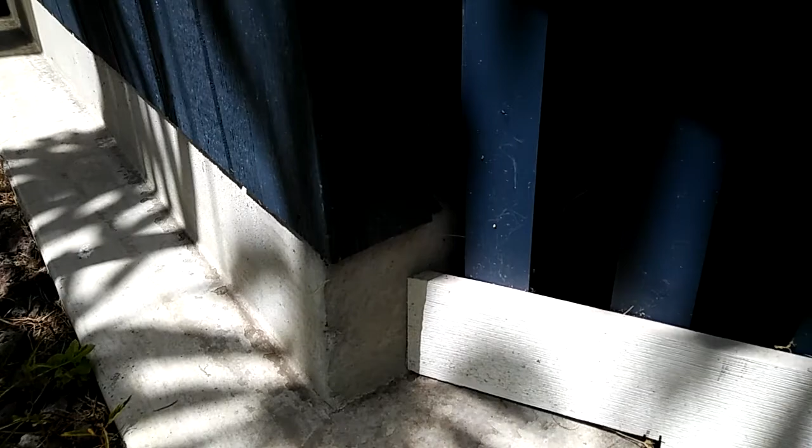I'd like to start off with concrete. I decided to go with this curb design because I saw one that was done squared off, and out here the rain comes in sideways quite often. So water builds up on top of the square, and it starts rotting the walls out. So I went with the curb design, which turns out to be superior. That was the only thing I contracted out, the concrete work.

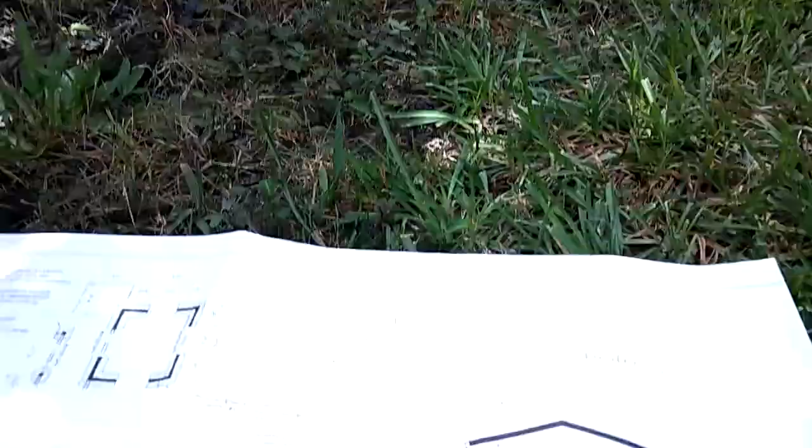Next in line are these walls. This here is the foundation, and you can see these 4 boomerang shaped concrete pieces, 12-sided.

Now this is a permitted build. You can build it this way even if you don't get it permitted at first, but in the long run, if you ever want to sell it, you could get the legalities done on the structure and the inspections. Out here in Hawaii it's kind of a choice, permitted or non-permitted. But permitted is better, because 10 years later you could decide to sell it.

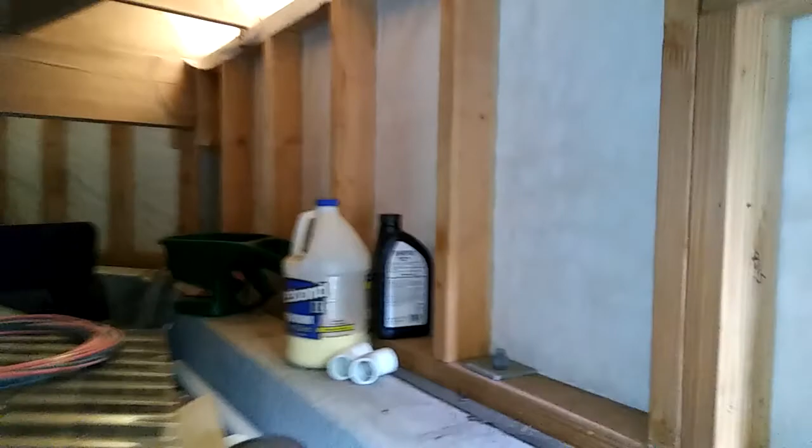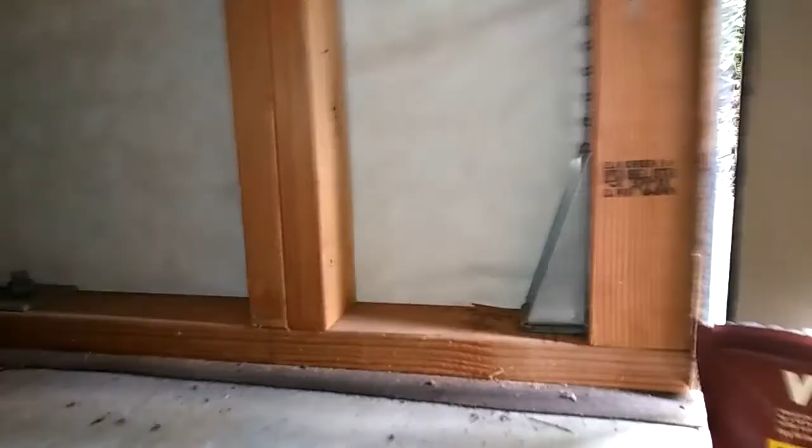So the first thing you'd build is these little walls here, about 4 feet tall. All my footers were not level with each other, so I had to adjust the walls - pain in the butt. But basically I just framed out 2x4 walls with treated boards, with the exception of the lag bolts coming through the concrete.

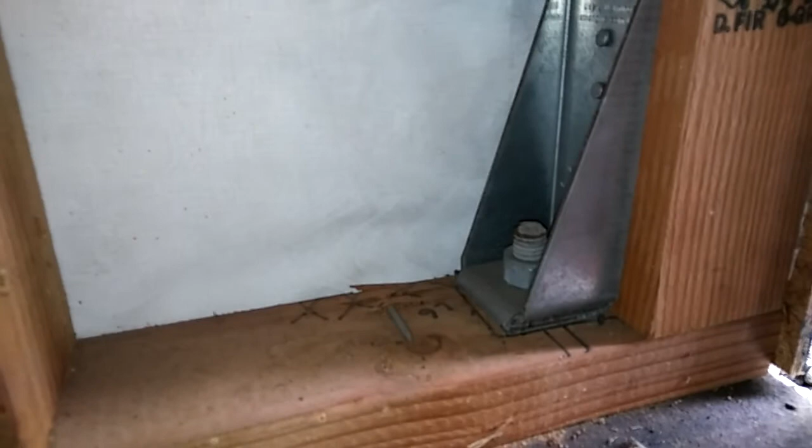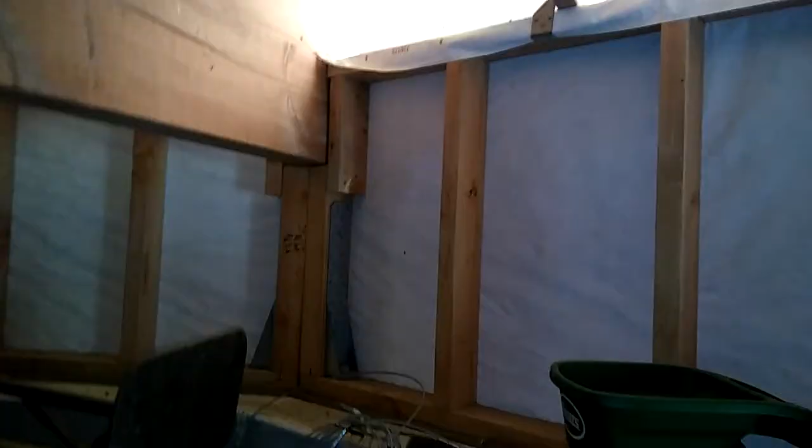Get these brackets here, and along here they get the big giant washers. Next step would be the beams. I got 3 beams coming across here - one down there, one right here, one behind me. You can set them on top of these walls, but it'd be that much higher, that many more stairs.

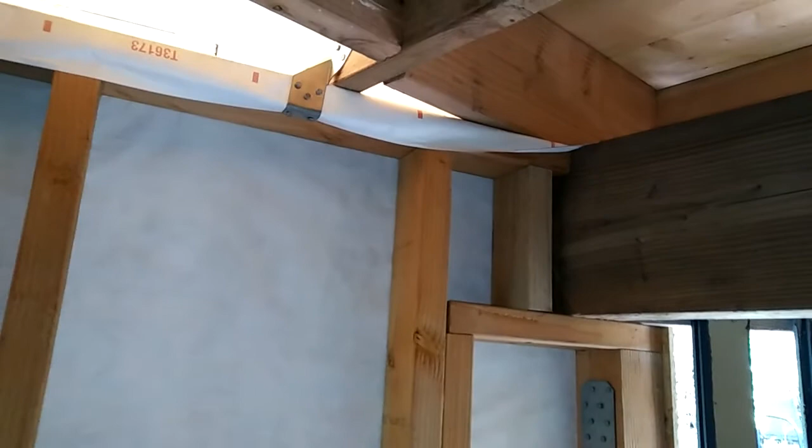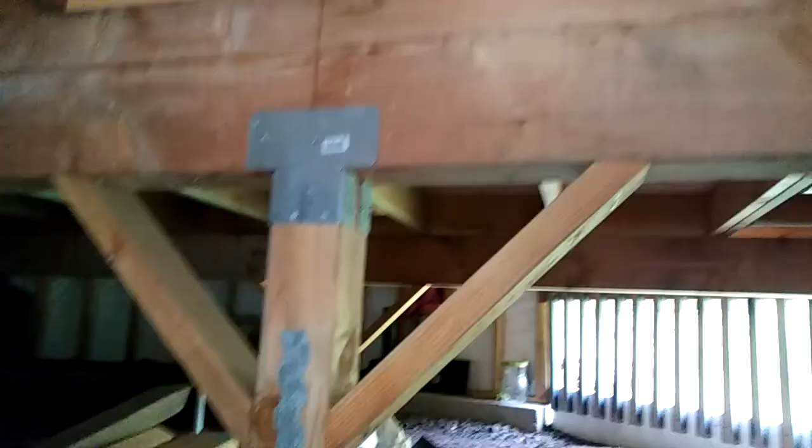What I decided to do is notch these walls out and drop the beams down level with the wall. That prevented it from being too tall, and also had some other advantages on the outside, as I'll show you. I have 7 of these footers with 4x4s coming up to each joint in the beam, and all these brackets, which are nice. Each of the 7 footers, I had to put knee bracing on, because they're crazy about that here in Hawaii - everything gets knee bracing.

After you've installed your beams and walls, you get to your joists, which a lot of yurts go with a 4-foot gap. I went with a 2-foot gap, which is what you need to get permitted. Did every bit of this myself - a whole lot of blocking over every beam.

And of course the tongue-and-groove flooring, that was screwed and glued every board - 2-inch stuff, white pine.

And that's almost it, besides I closed in these gaps. Those chickens were getting under here and laying eggs and pooping, you name it. It's all closed in now.

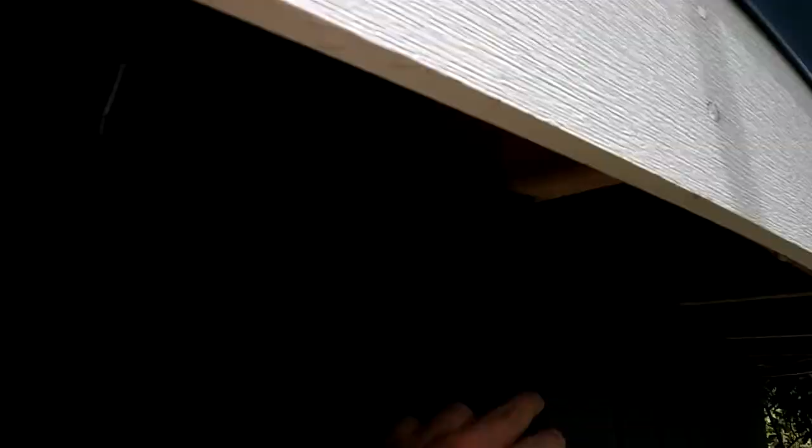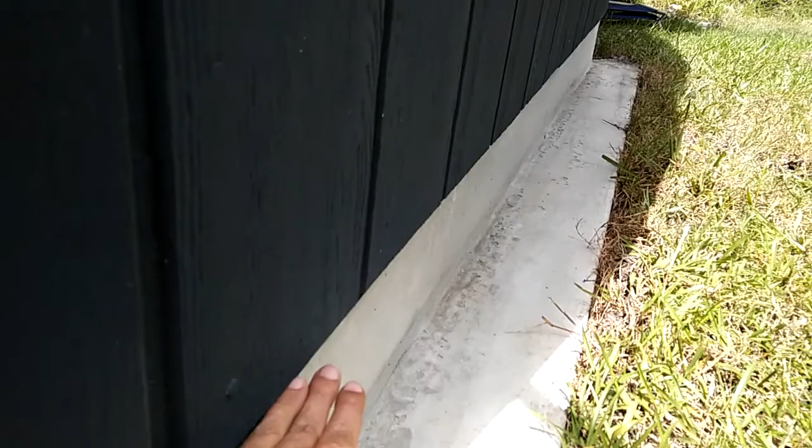At the last minute, I had my concrete guy move everything back and cantilever the entire thing so these walls would be more protected from the elements. In the original design, this corner came right out to this board here, what they call drip edge. But I recessed it about 6 inches all the way around, cantilevered it for a little more overhang. So not only does my board not touch the concrete where water puddles up, it's cantilevered and hidden from the elements pretty much.

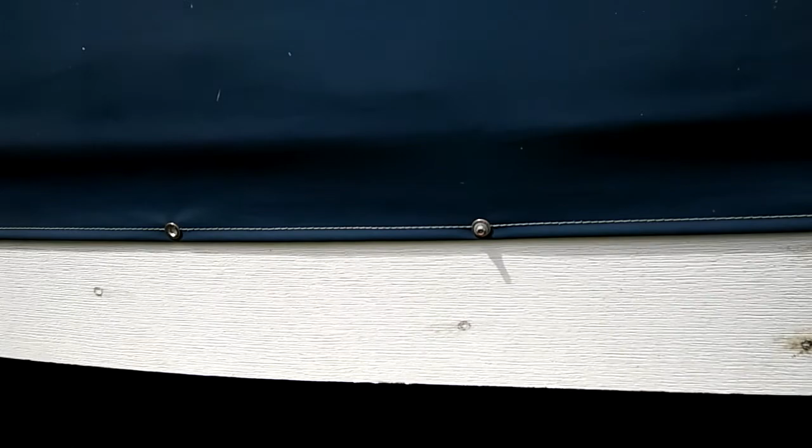Forgot to mention, I put tar paper, felt paper, underneath the walls, framed on top of the tar paper. This board here is a composite board made out of PVC material. They recommended using plywood, and I said negative - it's a drip edge, and this material is superior, but it was expensive.

Hi, Sadie. What are you doing, busy?

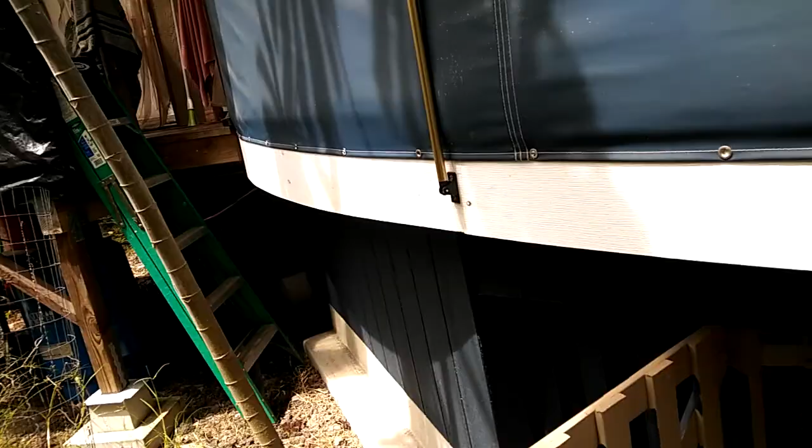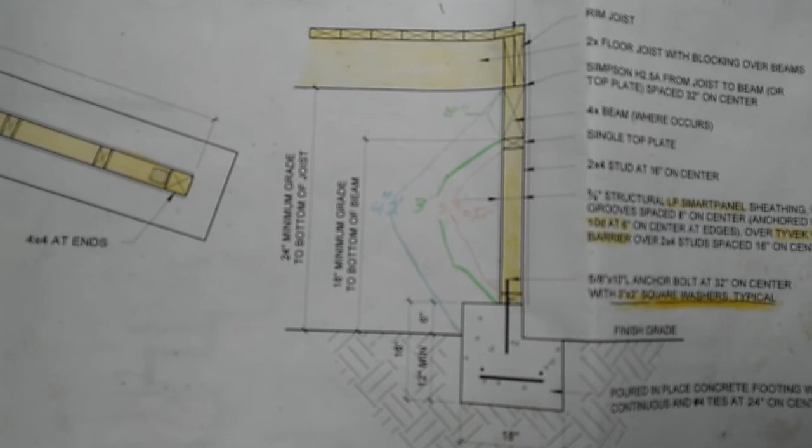But that's about it on the foundation. Passed with flying colors - that's the joist layout, of course that's the footers, retaining wall, and concrete. That's a side view of the retaining walls and footer, and that's the footer, the wall on it. Getting those bolts to line up - heavy trick.

It's raining again, seems like every 2 hours here. But that's about it on the foundation. So hope some of that helped out.